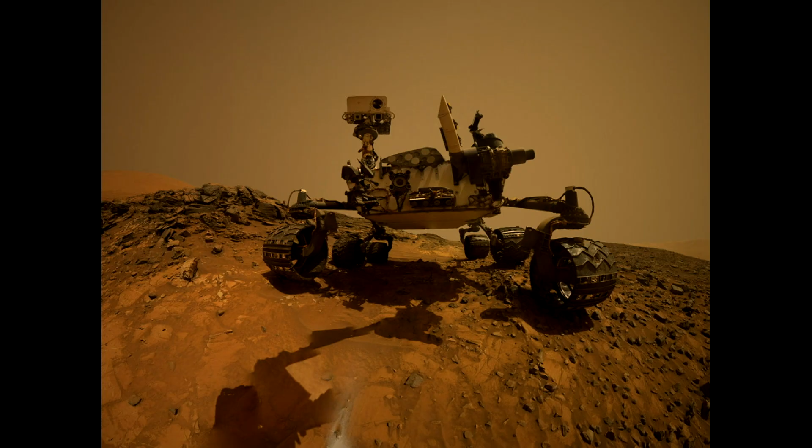Okay, here we go. So I am a space nerd, as Kevin kind of alluded to. My background's in aerospace, and this is one of my favorite robots, the Mars Curiosity rover. Everyone's seen this thing. This guy has been on Mars for 12 years, which is amazing, right? It's super impressive as an engineering feat. In that time, it's driven about 32 kilometers, also impressive.

So the rover drives around autonomously as long as the conditions are benign and the ground's relatively flat. There's no big rocks or slopes. But if it runs into any of those things, it basically stops, takes a bunch of imagery, and then phones home and says, I'm stuck. And then the rover drivers at JPL go out back to this big sandbox. They take all the image data, and they basically try to recreate the environment around the rover on the ground in the sandbox. And then they drive around and practice all the possible things that could happen and decide exactly how they're going to drive the rover.

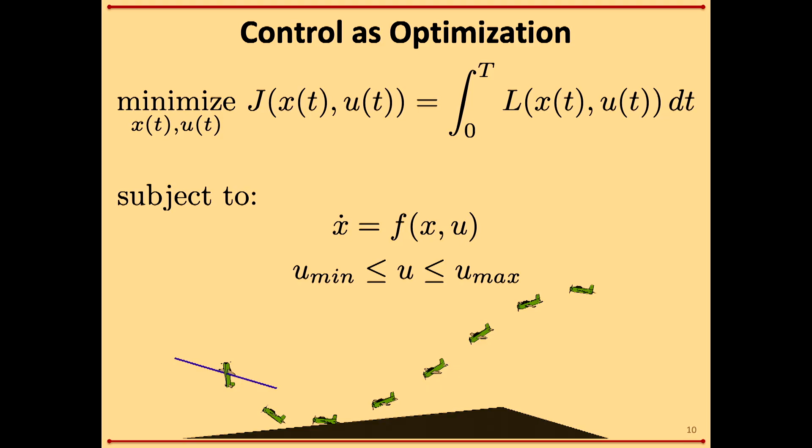You write down a cost or reward that says what you want to do. You have a model of your robot with your dynamics, which could be F equals ma, or some kind of simulator, or a learned neural network model. Maybe you have some constraints that define the limits of your hardware or safety. And then you have this objective - a reward or cost - that encodes behavior, what do you want the system to do. You write this down, discretize it some way, put it on your computer, turn the crank, and hopefully get something reasonable out that you can run on your hardware.

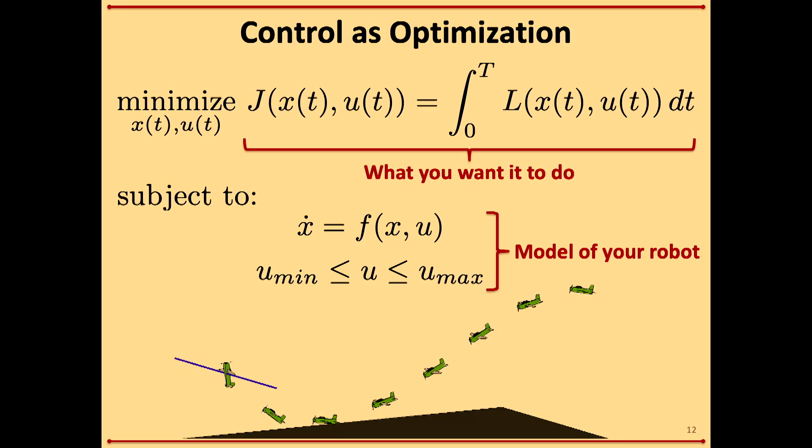So we've done a bunch of work, I'll highlight and tease a little bit of what we've done in each of these areas. As Kevin mentioned, we did some work recently in two interesting directions we've been pushing on the last couple of years with regard to scaling of these methods. We do a lot of MPC.

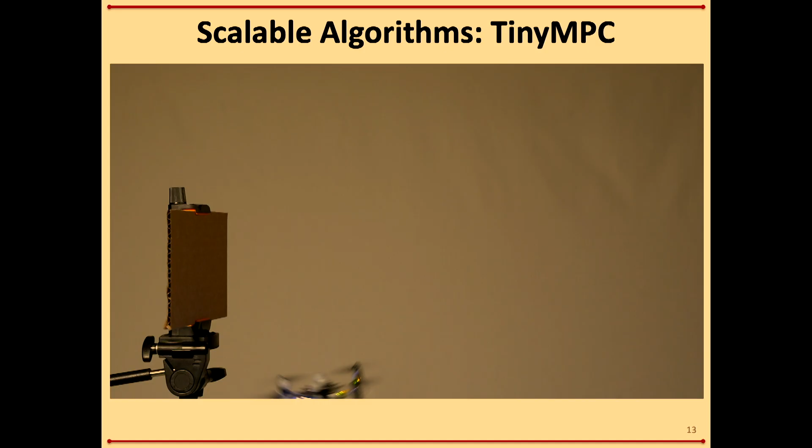We had this paper called TinyMPC where we developed a really lightweight solver that can run onboard tiny little resource-constrained microcontrollers. This is running onboard a Crazyflie - a little STM32 like ARM chip at like 200 hertz. It can do real-time obstacle avoidance and fly around, all onboard, which is kind of cool.

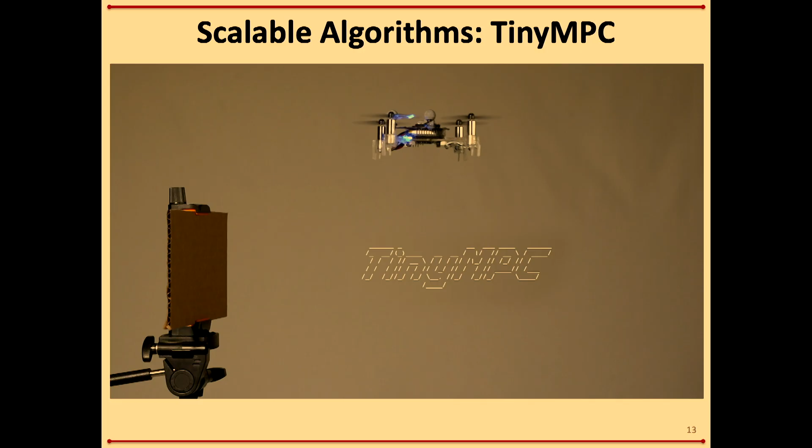So this is one extreme of the scale. The other extreme we've been really into the last few years is trying to figure out how to exploit modern computational hardware to do this stuff faster. It turns out a lot of the solver algorithms we use, particularly for MPC, are still very serial and single-threaded and run on CPUs. We still haven't figured out generally how to exploit GPUs and large-scale multi-core processing hardware to do this stuff.

So this is the first thing we came up with in several years of poking around that actually worked. It's called ReLU QP, and the idea was we figured out a way of analytically transforming QPs into ReLU networks. There's no learning involved - you give me a QP, I can analytically derive the weight matrices and throw it on a GPU.

We're able to do things like whole body control on Atlas - relatively large state and input space, relatively long horizon problem. This is running at 2.5 kilohertz, so an order of magnitude faster than we can do right now with off-the-shelf stuff. I'm really excited about this, I think it opens up a lot of interesting ideas.

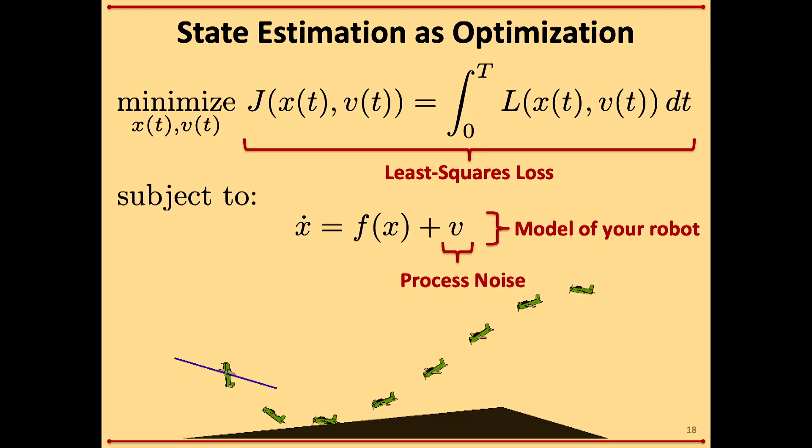So we've done a bunch of stuff in this area too, using very similar algorithms. I'll highlight a couple of these - this is kind of more on the space side. We actually build and fly satellites in my group. This is a mission we flew this year, 2024, that just ended, called PY4, where we flew a little swarm of satellites in low Earth orbit. They talk to each other with cross-link radios, and they can do two-way time of flight ranging between each other.

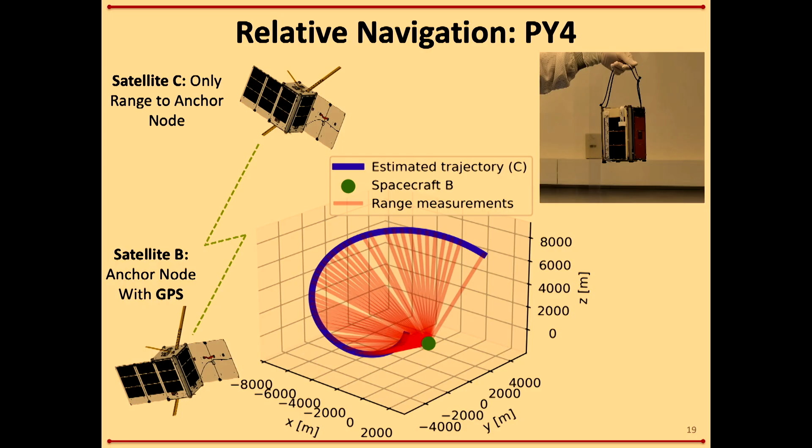And we're able to do full 3D relative pose, basically relative orbit determination, using those signals and some other stuff. We actually did this in space on orbit and got 70 centimeter level, 1-sigma relative navigation going on these things autonomously. It was really cool. We also built all the hardware in-house, which is pretty cool that we got it to work.

Another thing we're getting into now that I'm pretty excited about is vision-based orbit and attitude determination. I call this the lost in space problem. If you fling a satellite out in orbit, it has no idea where it is, and it just has onboard cameras. We're trying to figure out how to take images from those cameras and not only reconstruct instantaneously the pose, but predict the orbit and all that good stuff. There's some machine vision in here and a bunch of cameras, but at the end of the day it turns into this fun little optimization problem.

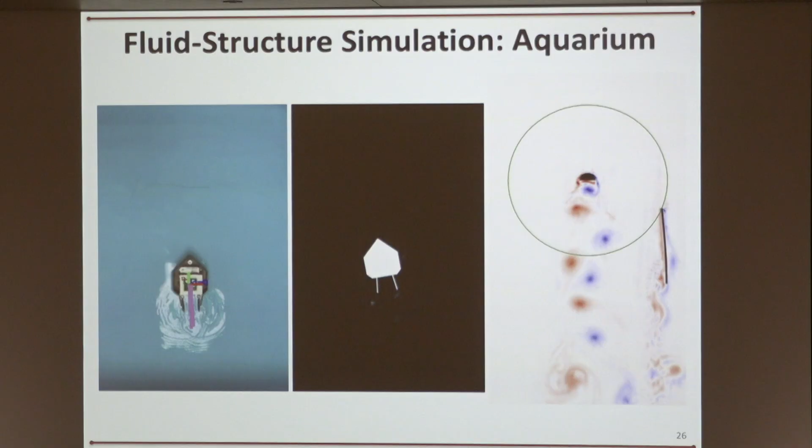So, kind of cool. The idea here is the inequality constraints have to do with how you match up the robot with the fluid. Basically, it's the classic no-slip boundary condition, the idea that the fluid isn't allowed to penetrate into the robot. That's really naturally posed as a constraint, and the multipliers there end up being the pressure forces. It's all really natural.

The last thing I'll mention in this vein, because it's going to come up later, is that friction, which is also non-smooth and annoying to simulate classically, can also really nicely be posed as an optimization problem. This is called the maximum dissipation principle. It basically says that the friction force due to Coulomb friction is the one that instantaneously sucks out the most energy from the system, subject to a constraint called a friction cone. This says that the friction force has to be less than or equal to some friction coefficient mu times the normal force lambda.

The idea here is that if I imagine a brick sitting on a table and I'm pushing it, it'll stay put for a while. That corresponds to this friction vector being inside the friction cone. I keep pushing a little bit harder, and eventually the friction force will get to the boundary of the cone. If I push a tiny bit harder, there's no more friction left, and that's when it starts moving. So that non-smooth stick-slip behavior falls out of solving this constrained optimization problem.

It's kind of cool. And then the last one, in this whole mess of everything's-optimization that I'll mention, is we've done a bunch of work recently. One of my PhD students, Kevin Tracy, showed up with this idea, and I loved it—it's beautiful. It's posing collision geometry problems as a constrained optimization problem.

So you solve friction as an optimization problem, and if you find—what would you use it for? The only application I can think of is just using it in a simulation. Yeah, you kind of build it into a simulation like that. That's kind of different from what I'd normally experience—is that a good application? Yeah, I mean, that's what we're doing with it. I think that's reasonable, and I'll explain a bit more why that's maybe a good way to look at it.

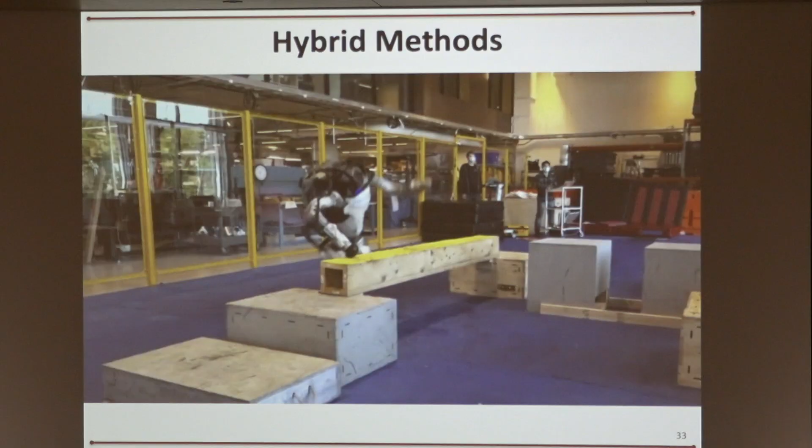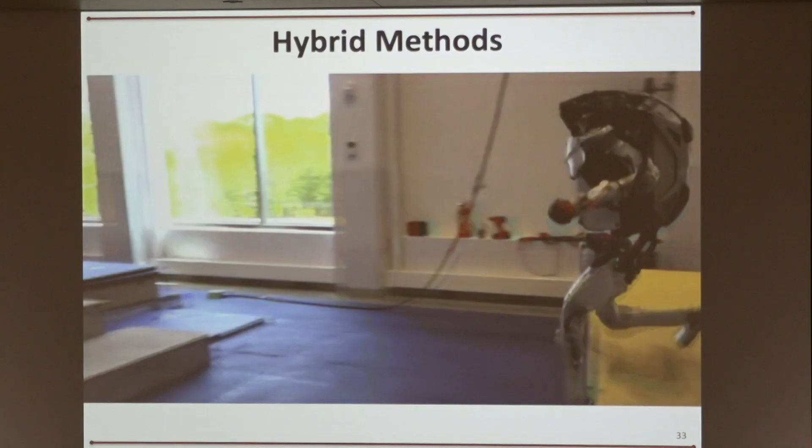Well, I think probably there was a little hand slip, but I'd argue the thing that really sticks out is that there was a contact with the toe while it was hopping over that block that was unplanned. So if you're doing this hybrid stuff, you're pre-specifying which parts of the robot are in contact with the world using some heuristic or whatever.

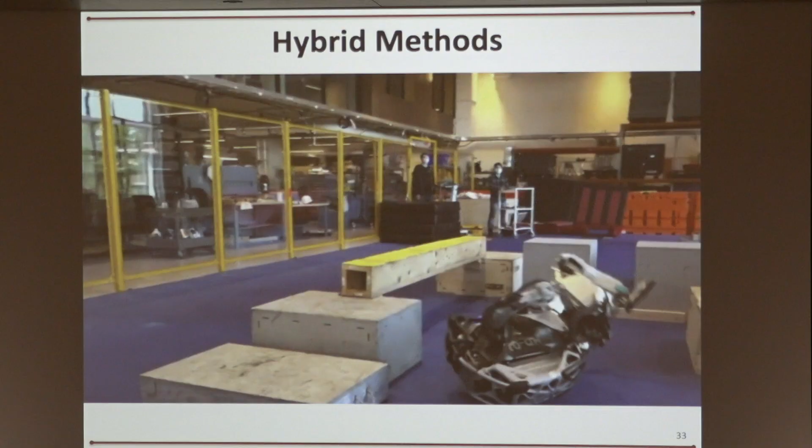So essentially, one way of thinking about this is the model predictive control algorithm is running open loop on the contacts. In that kind of situation, if there's an unplanned contact with a different part of the body, and the contact mode planner didn't tell the MPC controller about that, it just doesn't know. It has no idea there's forces that can be applied there, doesn't know what to do about it. It just can't reason about this in a real way. This is kind of a deep issue.

So the dream here is what people have called contact implicit. I want to be able to optimize over not just states and controls, but also contact forces, and have all the physics in there and get it all out at once. The problem is historically this has been really hard numerically to do - there's all kinds of stiffness issues, numerical issues.

Okay, so now we're going to zoom in here and explain how we're approaching this. This is the idea I've called composable optimization. The idea is all these blocks are optimization problems. I'm going to zoom in on one of the blocks and explain how we solve it, one standard algorithm for solving one of these things, and then zoom out and show how we connect them. So let's take one of these, for instance - let's say this is that friction problem.

And to harp on a little bit, there's an x and a y here. I'm minimizing with respect to x, so that's what we'll call the decision variable. And y is some other vector, some other set of variables that we're not optimizing over, but the solution depends on it - we'll call this a parameter vector.

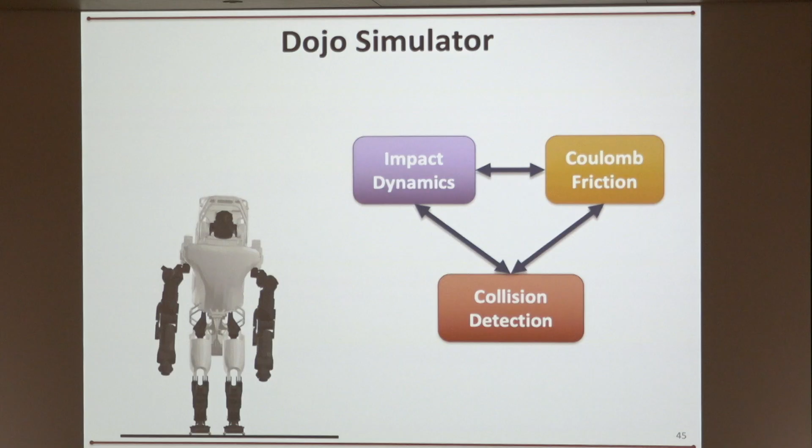One is that it can do real hard contact simulation. If you've played with robot simulators in the past, you might be familiar with how they generally do a lot of smoothing tricks and approximations. You often get artifacts like interpenetration where the feet sink into the floor, or creep where it's not exactly doing stick slip. We don't have any of that because we're basically solving these constrained optimization problems to convergence, and the constraints are explicitly in there. So if you solve that thing to convergence, you get a feasible solution - it's not going to do any of those things.

There's also really nice - I didn't talk about this earlier - this optimization-based way of simulating the dynamics by minimizing that action integral. This is called a variational integrator. This was Jerry Marsden at Caltech and a bunch of his students who worked on this stuff in the early 2000s. There's a bunch of really cool properties these things have. In particular, if the system's conservative, these things more or less exactly conserve energy and momentum. They're super stable, you can take big time steps with them, they do a lot of cool things. And then finally, we can give you smooth gradients to do downstream optimization out of this thing.

This sounds like having your cake and eating it too. Like I told you, we can do hard contacts, which are not smooth, but I can give you smooth gradients. So what's going on there? That feels weird and wrong. The idea is, when I solve these problems, I have that barrier parameter, and I start out with it super smooth and relaxed. That gives me nice gradients, and that's why interior point methods work. It's because in the beginning, I smooth it out, and I can take nice optimization steps with smooth gradients, and then I gradually crank it down until I converge.

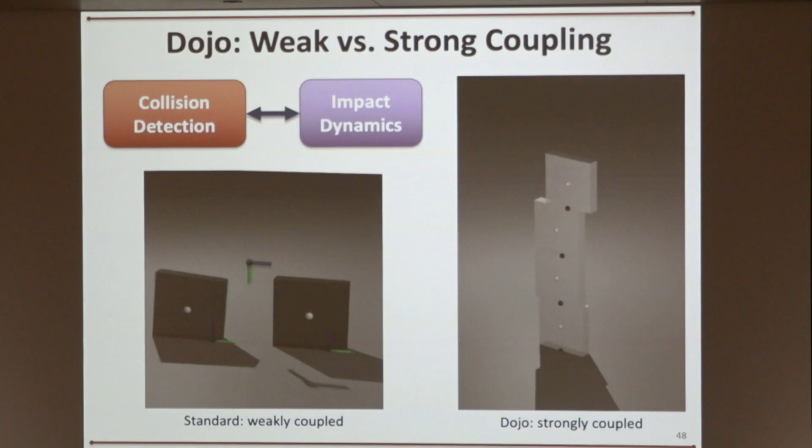So to be clear about exactly what we're doing, this is the setup. We have these two blocks, and I set the gradient equal to 0 for each one.

So for the top one, I'm setting the gradient with respect to x equal to 0, and I get this r of xy. The bottom one, say I'm optimizing over y, so think like friction and then the impact physics that we just talked about. So the other one, I'm setting the gradient with respect to y equal to 0, and I get this other set of optimality conditions. So I have these two sets of conditions.

I stack them on top of each other, and I jointly solve them with, in our case, Newton's method, but you could do other things. The idea is I'm jointly solving this coupled set of conditions simultaneously to get everything to satisfy. And that's what's giving you this really nice kind of strongly coupled thing that's doing the right thing.

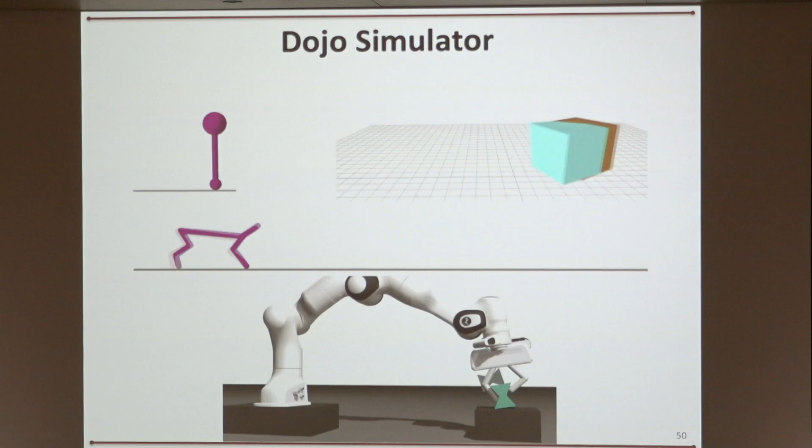This is to say these smoothed gradients combined with the hard physics answer give you useful gradient information for doing downstream motion planning, state estimation, RL, whatever you want to do. Okay, so that's sort of the physics story.

So now I want to talk about the whole thing. We care about doing motion planning, trajectory optimization, all the above. So we want to put all the blocks together. We did this, and you can get cool things to come out, like there's a couple examples, but the sad thing is these examples take like order 10 minutes to optimize just a few seconds. This is very slow, and I want to do this online in real time on the robot.

So then we started thinking about how we could approximate all this stuff to make it fast. I'll talk about that a bit now.

So first, let's say I solved the planning problem offline, solved this whole thing from scratch, and got a solution. Now given that solution, I want to go run it on the hardware and stabilize it, track it, mop up errors, that kind of thing. So inside that control problem, I'm going to replace my general objective with a tracking cost. I take the reference solution I solved offline and put a quadratic tracking cost on that, which just says stay close to the reference. So that makes that easier.

Inside the dynamics, I'm going to linearize the robot dynamics about that reference trajectory. When I say linearize, I'm not linearizing anything to do with the contact. I'm keeping this entire setup—these are all still constrained optimization problems. But where the floating base dynamics of the robot show up, instead of them being nonlinear, I'm locally linearizing them to get an AX plus BU kind of thing locally around the reference.

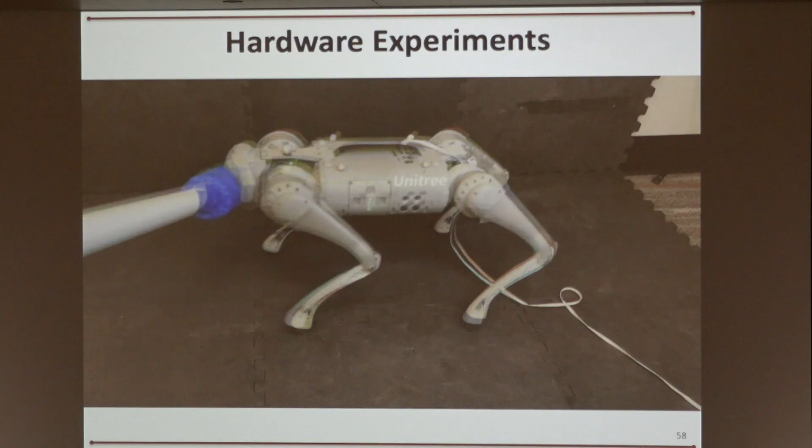All of this comes out of this one linear model that we linearized about the reference trot, nothing extra. And we can solve this online at about 100 hertz, so it's real time. I think this is a nice story about the power of linear models. We put this on hardware, so you can do it, and it runs fast enough.

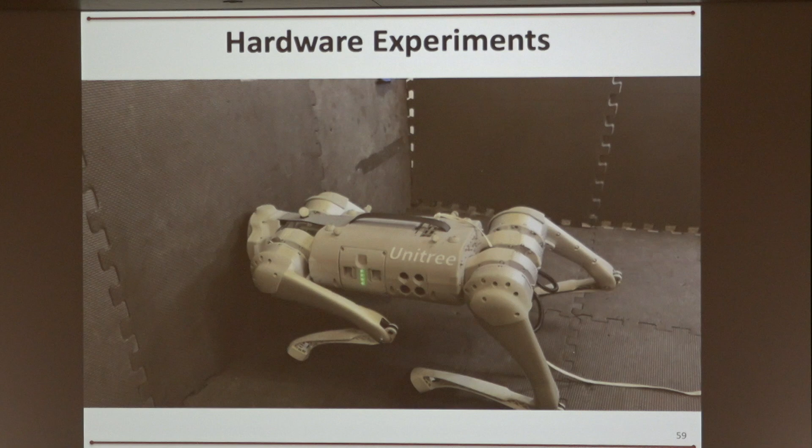What we're trying to do now, which is a bit dated but we have newer work on that I'm excited about, is basically: because we have all the body geometry here, not just point feet, we can do other things. We can do contact-rich things with the environment, weirder stuff. Right now we're working on things a bit beyond this, funky climbing behaviors that leverage contacts with the rest of the body, which I think is super interesting. And the solver can reason about that, it's got the signed distance function in there, so it can think about these things in a deeper way.

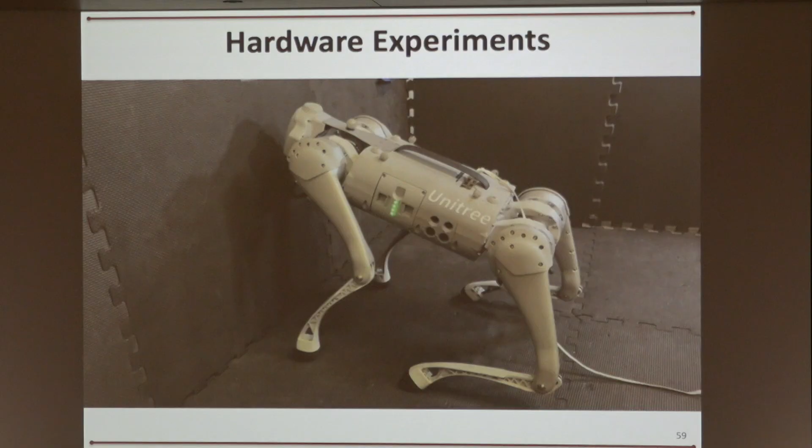Okay, so that's the control story about this. Now I want to briefly highlight some other things you can do with this setup, this composable optimization idea. It turns out this goes really deep, and there's a lot of other cool things you can do with this idea of jointly solving multiple optimization problems.

One thing on the left is a project we did a few years ago. It turns out this also encompasses games, dynamic games. This is doing autonomous driving, modeling the other drivers as agents in a Nash game. It turns out Nash games are a special case of this composable optimization story. Each block is a player in the game, they have their own optimization problems, and they're coupled. We're able to do this efficiently with the same solver tricks, solving this multi-agent game theoretic MPC problem for up to about 6 cars at 40 hertz. So it's real time, and you can reason about complicated interactions like merging, how your behavior influences other drivers.

The other thing, on the right, is classical robust control, which can be formulated as a minimax optimization problem or a Stackelberg game, also falls under this framework. So I can model games against nature, where I have a disturbance trying to make my cost bad while I'm trying to minimize my cost. This kind of setup can also be modeled in the same framework. There's a bunch of interesting game theory connections.

Some other stuff we're messing around with: dabbling in manipulation a little bit, and I think there's a ton of cool things there. In particular, what this is doing is we're focusing on parallelizing a bunch of this stuff on GPUs.

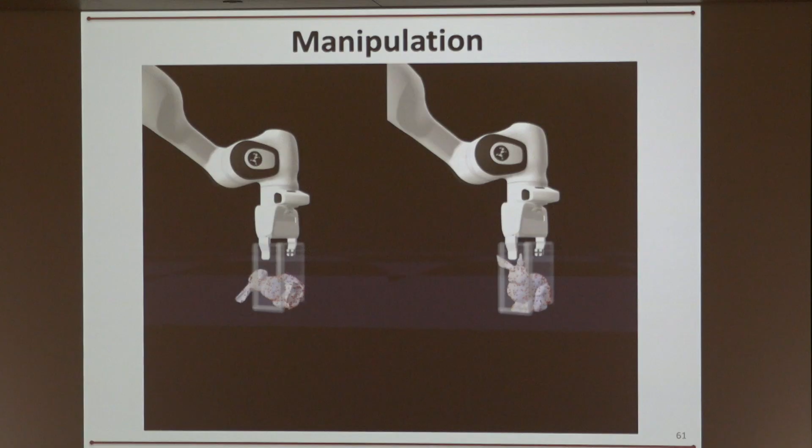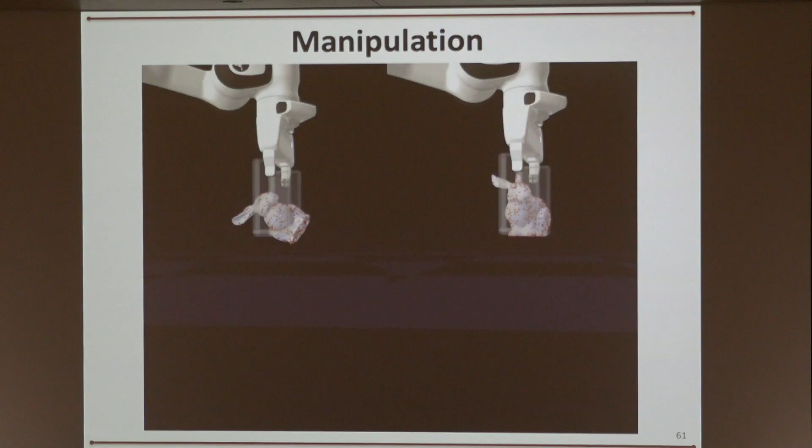We're trying to compute collision geometry, sort of contact geometry, with a really weird, unusual shaped object. The idea is you take a point cloud of the object, and all of these contact and collision geometry calculations in that optimization setup parallelize trivially across points. So if I model the robot gripper as a set of rigid bodies, and cover the object in points like a point cloud, I can throw this on a GPU and evaluate 5,000 points worth of collisions for the same price as one point's worth. So I can do this kind of stuff really, really cleanly.

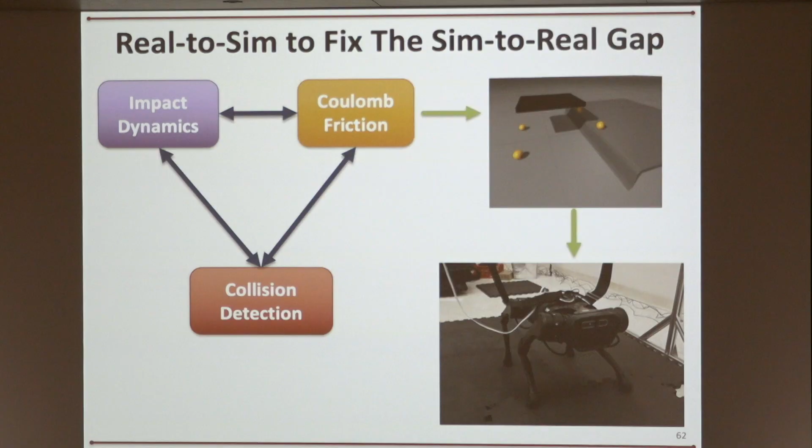Some other random thoughts: if I have a differentiable simulator, people are talking about these ideas mostly in the context of training RL policies. But I think if I had a differentiable simulator, an even more powerful thing I could do with it, which I haven't seen a ton of in recent robotics, is basically system ID or real-to-sim.

If I train an RL policy, run it on a robot, and there's some difference between what I see on the hardware and what I predicted in simulation, why not take that data and backprop it through the simulator to regress all the stuff that's hard to model? Not only can I do parameter fitting of friction coefficients and masses, but I could also throw function approximators in there in all kinds of weird places and estimate weirder kinds of friction models, whatever you want. So I think this is really interesting and powerful, and something we should probably be doing with differentiable simulators.

Residual learning, take your pick.

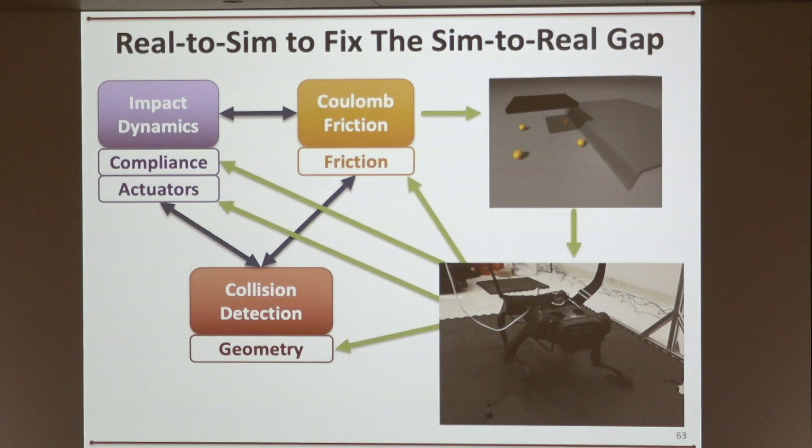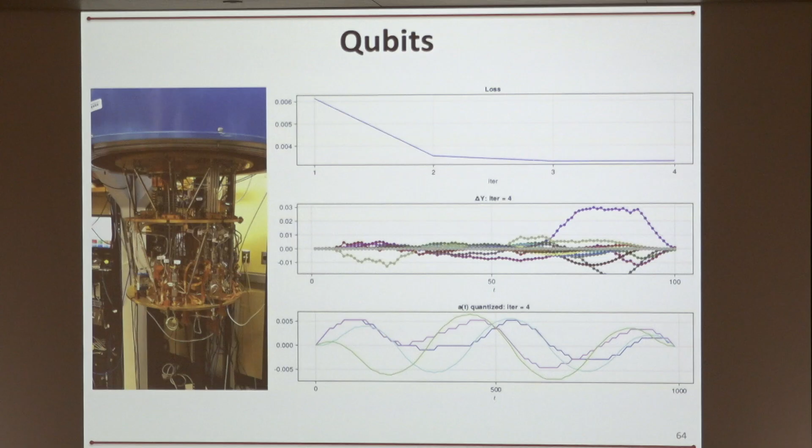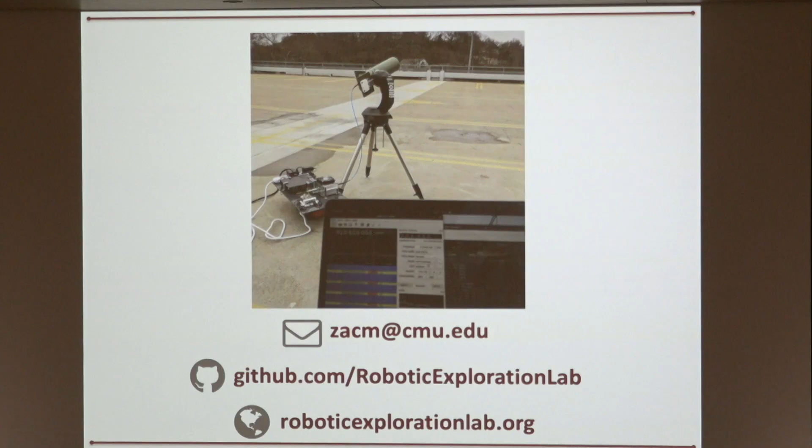And with that, I'd love to chat, take questions, and this is how you can get a hold of me and bug me. Incidentally, that picture is me on the roof with a satellite ground station trying to talk to one of my satellites.